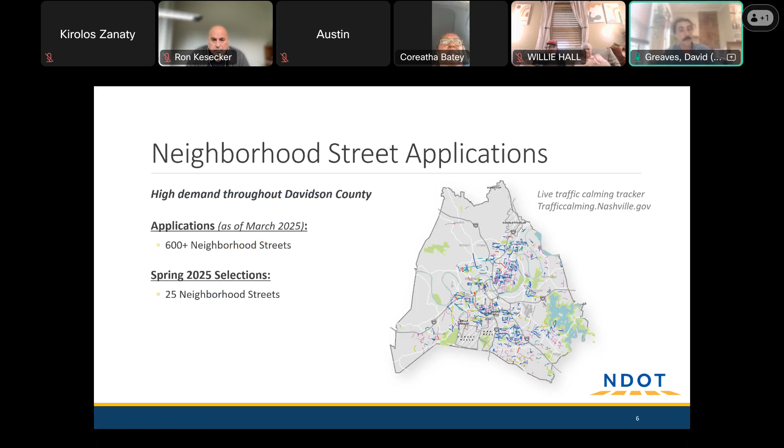So like I mentioned, there's a few things that the traffic calming program does. We have kind of a limited toolbox, but there's all sorts of things that Metro Nashville can handle outside of the traffic calming program, whether that's things like potholes, anything in disrepair. You could request things like sidewalks through this. So Hub Nashville is an important way to interface with Metro Nashville more broadly than just the traffic calming program.

That can be accessed by calling 311, or online at hub.nashville.gov. And they also have a smartphone app that can be downloaded if you're a frequent user. So I've got it, and it's very convenient.

Moving on to how Cumberland Avenue was selected for traffic calming. So after you all applied, we went out and collected some data. We measured vehicular speeds, counted how many vehicles drove along Cumberland Avenue. We also took a look at crash history, noted whether or not you have sidewalks. You do not, as we know. And then we took a look at proximity to trip destinations. So how close are you to things like libraries or schools? I know that you're adjacent to a park, so you scored some points for that.

And all of that gets rolled up into a formula that ranks all 600 plus of those applications, sort of in order of how much we think that the traffic calming could benefit that street. So Cumberland Avenue, once we stacked all of those factors up, you landed in that top 25 to be selected.

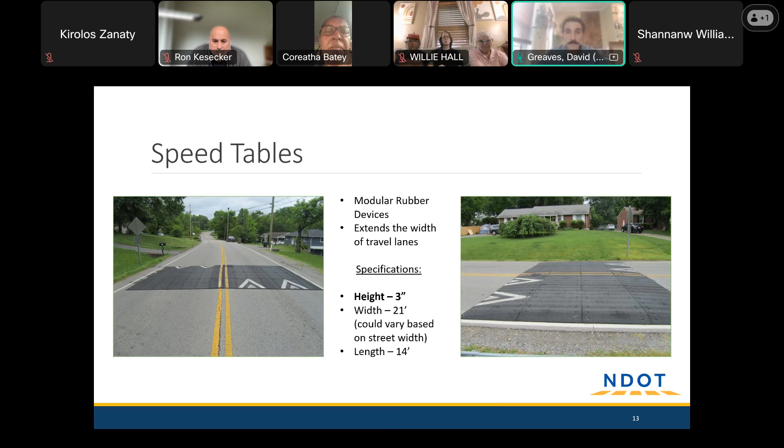Yeah, as you can see, these stretch all the way across the road, but for the reasons I mentioned a moment ago, we tend to prefer speed cushions over speed tables to limit the impact we have on emergency response vehicles when we can. Those two combined are definitely the heavy hitters of the traffic calming program. You'll see them in most of our designs. And the reason for that is we have found that they work pretty well at achieving the program's goals.

So when we did a before-and-after study of a few projects, we found that the average speeds on those roads came down from 31 miles an hour to 22, and the 85th percentile speed came down from 37 all the way to 25. I think I maybe neglected to explain what 85th percentile speed is. So that is where 85% of vehicles measured were driving that number or slower, and 15% were driving faster than that.

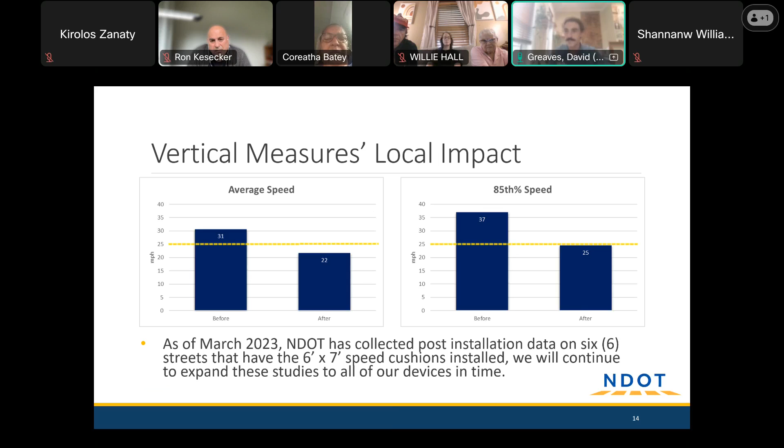So with y'all's 85th percentile speed of 39 miles an hour, we had 15% of drivers going even faster than that. I suspect the drag racing would probably fall into that category, but all that is to say, it's not the maximum we observed. It's just a statistic to communicate the spread.

There are instances where we can't use speed cushions, steep hills, curves, things like that. So we also mix in a few other tools sometimes. Radar feedback signs are one of them. So I think we've all seen these before, but basically it's a solar powered device that goes underneath a regular speed limit sign, and it just reads a driver's speed and reports it back to them as they approach the sign. So the thought is that, if you're going significantly faster than the speed limit, you'd get a reminder to

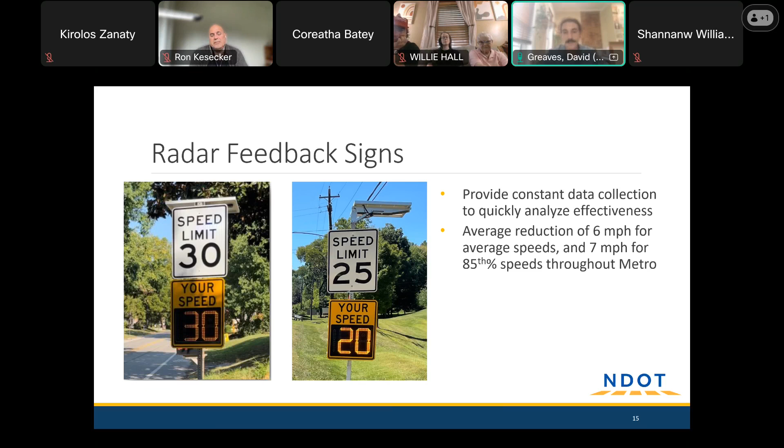slow down. Now, unlike the speed cushions or speed tables, it doesn't physically do anything to somebody driving through. There's no enforcement attached to this. It's not reading license plates or taking pictures or anything. It's just for the driver's information. Even with that, we do see an average reduction of 6 to 7 miles an hour. So they don't do nothing. They do reduce speeds in neighborhoods, but without physically affecting vehicles that are driving on the road there.

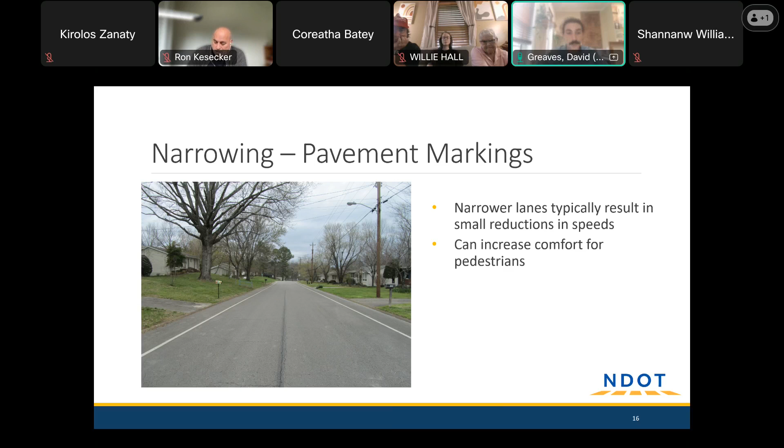On streets that have excess pavement, we can kind of narrow the road with paint. So this, again, doesn't physically affect how anyone is using the roadway, but it does sort of have a psychological impact of making the road feel a little more claustrophobic. That can reduce speeds just by nature of feeling a bit more compact, more like a neighborhood, less like a highway. This can, in some circumstances, increase the comfort for pedestrians. So if it creates a little bit of a space for walking where I'm over here on this side of the line, you're over there on that side of the line, that can be a benefit, but it's certainly not doing the same job that a sidewalk might do.

Similar to the pavement narrowing, we can shrink up intersections if we see that they're larger than they need to be. Intersections that have excess pavement can sometimes induce speeding by allowing drivers to take turns much faster than we would like them to for safety's sake. So when we shrink these up, we both narrow the turning radius, that slows down cars as they're turning. We also kind of narrow that approach space. That can help communicate that the drivers should be taking this intersection slower. So we'll sometimes propose these when we do hear that running stop signs is a problem.

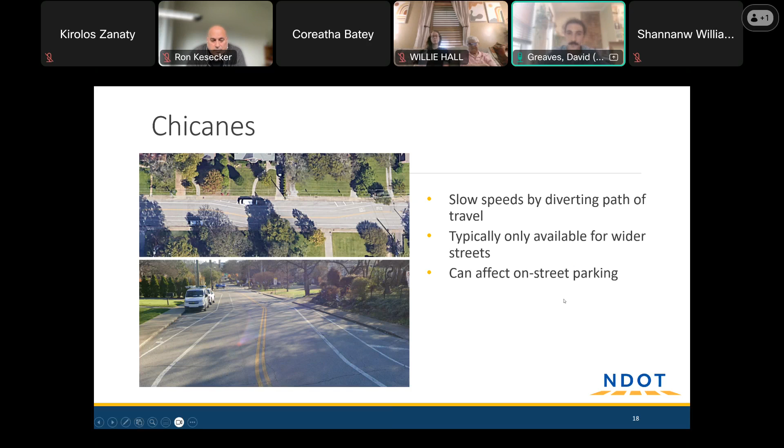And then lastly, we sometimes do traffic circles. This works like bulb outs, but from the inside out rather than the outside in. And they work just like a regular roundabout where you would start going counterclockwise around the circle, no matter which direction you are turning.

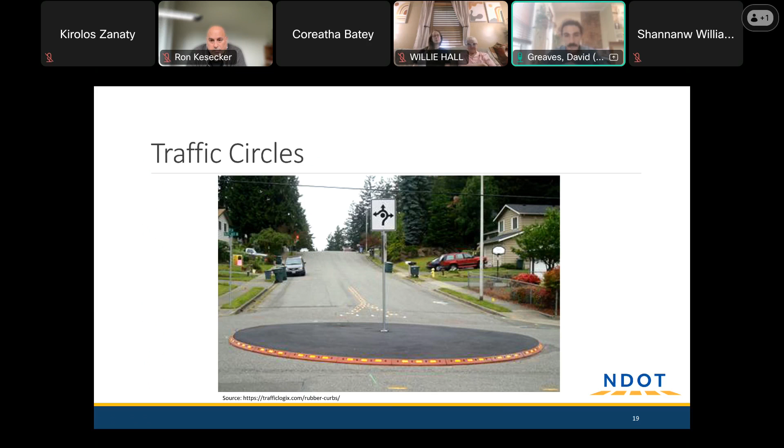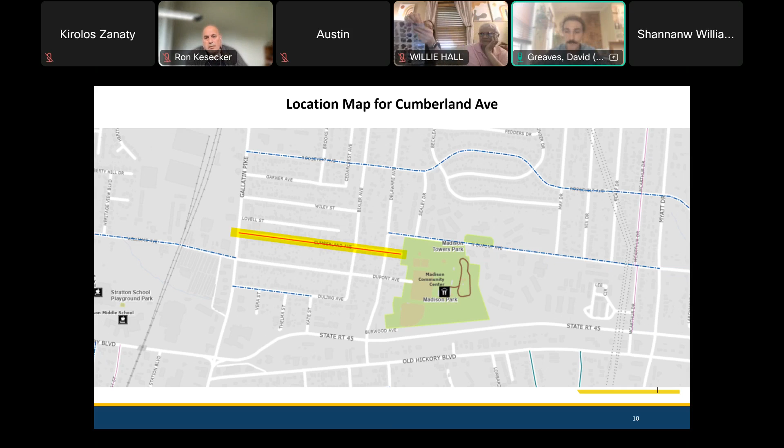Yeah, and if they're driving around the speed limit, that's okay. We don't necessarily want these to be devices where everyone needs to slow down to like 5 to 10 miles an hour. Right. But that is good to know, and I would want to find out if DuPont is still seeing the speeding that we were hoping to quell a little bit. Duly noted. I will look into if this is a street that tables might be considered on. I can't say yes or no right now, but I appreciate the recommendation. Thank you.

I had a question about the plan that was on there. So I saw the speed cushions, and then there's white lines as well on the sides of the roads. Is that part of the plan? Oh, so what we've got here is just a general image we include on all of these to make sure people know what speed cushions look like. We may not do 3 across. We're probably not going to do a whole lot of striping.

But is the striping something that y'all are excited about? I know that 25 is wide enough that we might consider it, and 22 is narrow enough that we wouldn't be accomplishing much with the stripes, but I would like to know if y'all feel good about that. What do you think? For me, it's not necessarily the striping, but the white lines on the side. Just because whenever we're walking to the park or the playground, there's just no space, there's a quick drop off to the drainage and the road, and it would be nice to have, aside from having a sidewalk, which would be amazing, some sort of denotation of where the road and the people should be walking.

Yeah. I can definitely look into it. So 22 feet wide, we would stripe 10-foot lanes, and that would leave just about a foot on the narrowest part. I don't actually know exactly which parts are wider and which ones are narrower, so I'll keep that in mind. And that's something that we may add to the plans. Great.

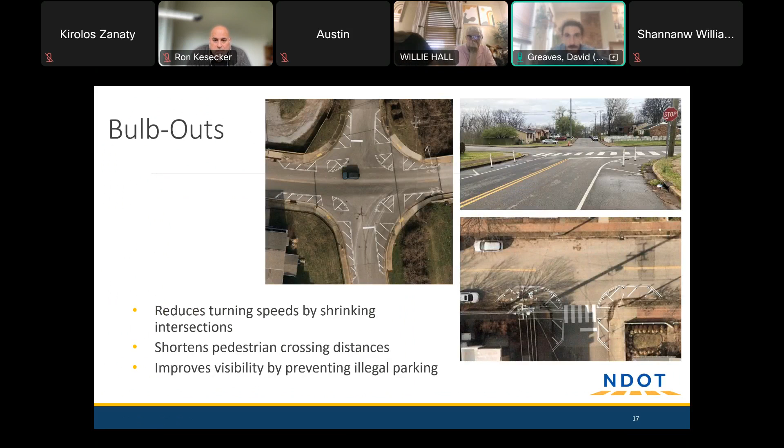Yeah, that's great. Sounds great. Wanted to just circle back to the question about bulb outs, to make sure I hear from anyone who may have opinions about those. It's something we can look into, or we could not look into it, depending on what y'all think. Can you say that one more time? Yeah, so I heard that there was some running of stop signs at Bixler and Cumberland, and one thing we could do to kind of tighten up that intersection a bit are bulb outs. That is these on the screen here. If y'all aren't feeling like you would like those, we'll just continue rolling with this plan, look into the edge line striping. But since I heard that y'all struggle with stop sign running, wanted to see if that was something you'd like for us to investigate a little further.

Well, it's not really a large intersection, but I mean, if you think that it would help. Absolutely. If it's not large enough that there's a whole lot of narrowing to be done, we probably won't, and we may just look into other means of slowing folks down. I think it's the speed down the street. That's our main concern. You know, 9 o'clock at night, they're not going 39 miles an hour. They're going 60. Yeah, exactly. That's certainly disturbing, and hopefully vertical devices like these will affect them the most. They're definitely not comfortable to drive over at high speeds. So yeah, we would like to see that go away for sure.

How many yards between the speed cushions do you have here? That's a good question. I'm just gonna really roughly count: 1, 2, 3, maybe 6 to 7 on average. We shoot for a spacing between 300 and 500 feet, depending on the constraints we're working around. And we also slot them in between gaps between driveways, so we don't place these in front of anyone's driveway. That would be quite unpleasant for them. So between the hills, spacing and driveway constraints, it's kind of like putting together a puzzle, finding the right place for these. Yeah. Bring 'em on.

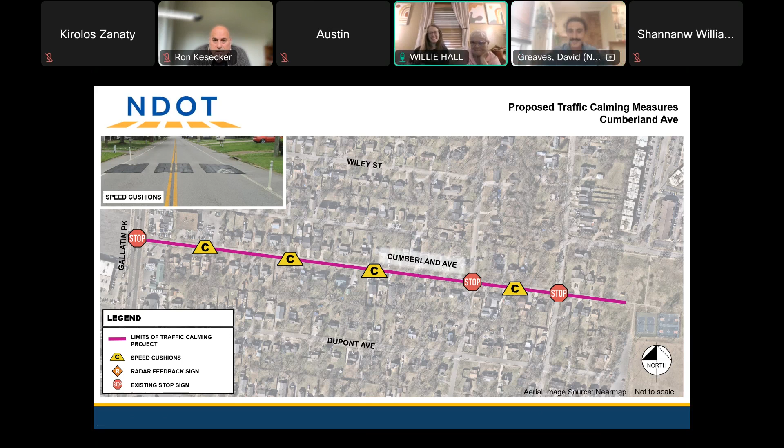And once we have all that information, we're going to finalize a set of construction plans. So once we've done that, we can either review those at a second neighborhood meeting, see what we were able to come up with, or we can post those plans online and begin the online balloting process.

So before we build anything, we want to make sure that we send cards to everyone on the street and hear, yes, I want this project to happen, or no, I don't want this project to happen. And if 2/3 of the people that respond say, yes, I want this project to happen, it'll enter the construction queue. And then, roughly 8 months later, we'll have a project built.

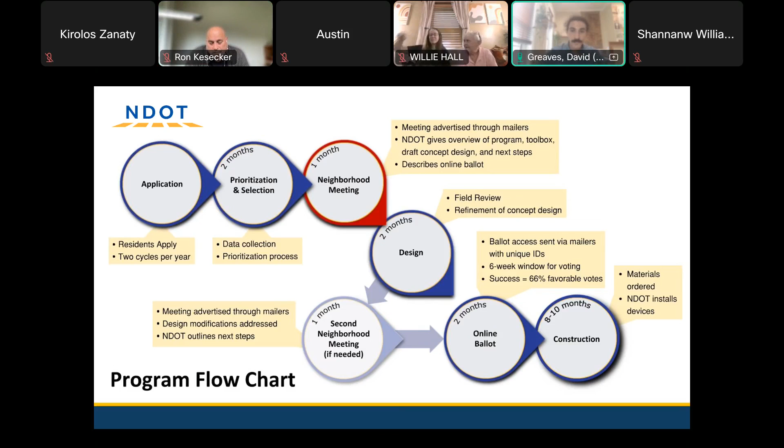Once we've got our design just about finalized, we'll reach back out and schedule another one of these, and you'll be able to review the plans in much greater detail than we've proposed so far. So we're gonna make sure in that second meeting we talk about the ballot in great detail. I do have those slides with me, so I'll run through them quickly, and if you have questions, let me know. But we'll also cover this at the next meeting before the ballot.

But yeah, basically we send cards similar to the ones that invited you to the meeting tonight, and you'll be directed to NDOT's website where you'll submit your vote. There's also a number to call, so you don't have to use the computer. You can call the number on the card and vote that way. And it's sent with a unique ID, so we make sure that all the responses we're getting are legit.

The zone of folks that will receive those cards is just all of the lots that are touching Cumberland Avenue, minus businesses, duplicates, etc. And then churches and schools. I don't think you have either one of those on the street, but they also get a vote as well. Any questions? We can go back to any of the slides, or really anything else you think of. I'm happy to do my best to answer.

Well, since we're on the voting, could you address the property owner? We do have a lot of renters on this street, and someone in our group that's been talking about this found that it has to be the property owner. And so what about if that is a property management company or someone who doesn't live at the address on Cumberland? How do they get word about this?

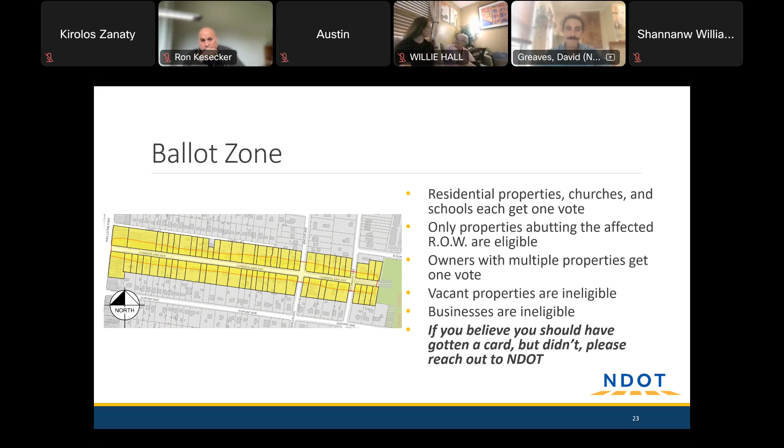That can be anyone, even not residents of the street. We want to hear from anyone who has something to say, and that can be accessed by engage.nashville.gov/traffic calming, and then finding Cumberland Avenue, since we've got a couple of these going on at the moment.